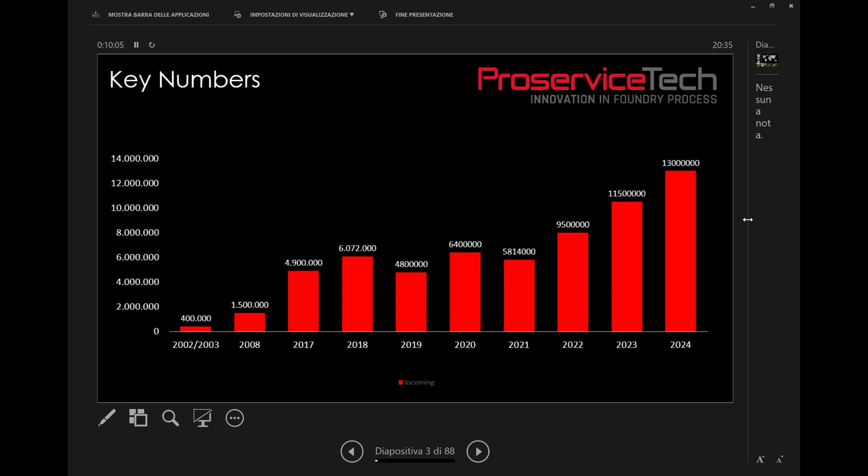Our turnover is around 11.5-12 million euro, and we are more or less 50 people, 90% engineers, divided in all the different engineering fields. So we have mechanical, IT, electronic, robotics, vision engineers, and metallurgical and process engineering. Okay.

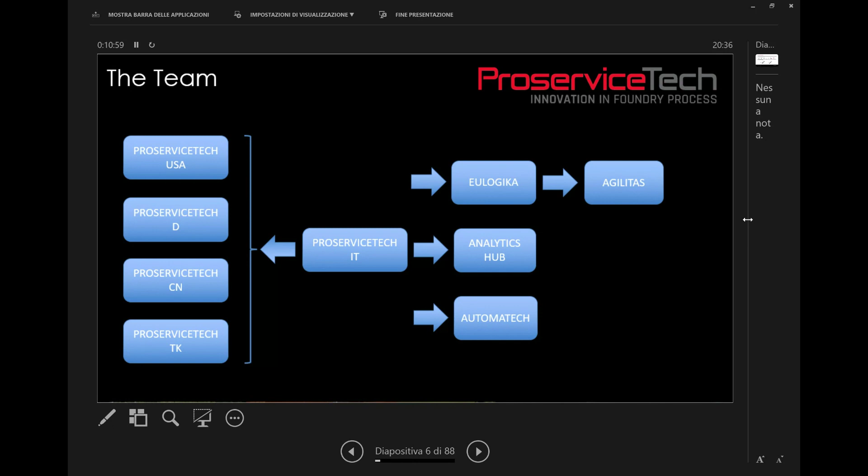So yeah, this is a little bit wavy, but on the left you see the places in which the company is. So US, Germany, China, and Italy, and also the other companies that we have. Eulogika is our IT company. Analytics Hub is a company that is also owned by us, a data science company, and Automatech is the grinding company. Okay. So why all these ranges of product?

Because at the end of the story, the leitmotif is always the same: sources of variance. So we know Trevor because from 2004 up to 2015, we worked as an engineering company of Foseco. So we developed for them some machines or processes like the converter, ICME converter system, or other solutions like the in-stream inoculation device. And we introduced inside Foseco the thermochemical analysis system.

In 2015 we closed all the agreements with Foseco, and we developed our sales network, and now we are working totally independently. But the idea is always to search for sources of variance inside the process. This is very clear. It's not only important how wide the Gaussian curve is for each process, but also the alignment. So if you treat different phases of the process differently, at the end the total variance is very wide.

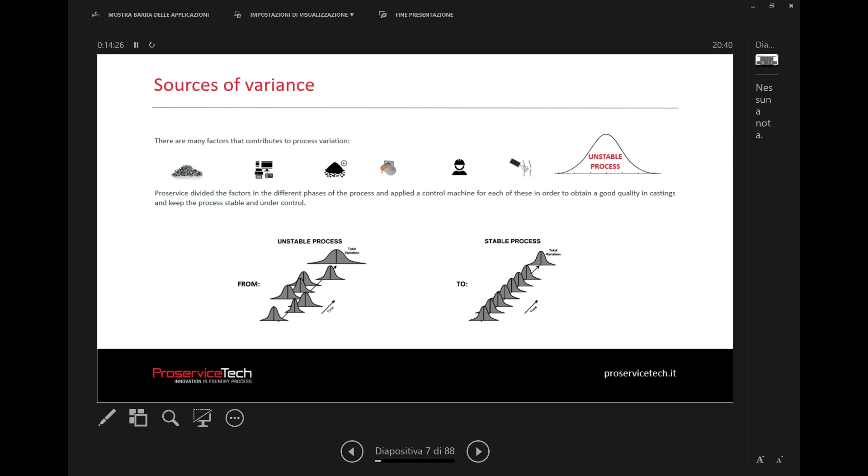I'll go quickly because it's a very long presentation. The presentation will start from base iron. I'll show our latest equipment, trying also to show some videos, and what is the difference compared to the traditional methods.

The first machines we will see are the ITACA Charge. All the products use the ITACA name on this side of the product, and the dosing machine is ITACA OptiDose. The ITACA Charge is an automatic crane—basically a CNC machine with a dual encoder for each axis. It's a normal crane, just a little bit more powerful compared to the standard.

The first machine we installed on the Z-axis—just to understand, for 32 tons per hour charging—uses only a 90 kilowatt motor on the Z-axis alone. It's a very fast machine, and this machine plays different roles in the foundry.

Normally we have three working modes: manual, automatic, and leveling. In automatic mode, you select the recipe and the charging crane automatically charges the charge cars, totally automatically. It's possible to identify a specific portion of the charge car to be filled with a specific material—so if we want a specific material to fall into the furnace first, to improve the induction, we can.

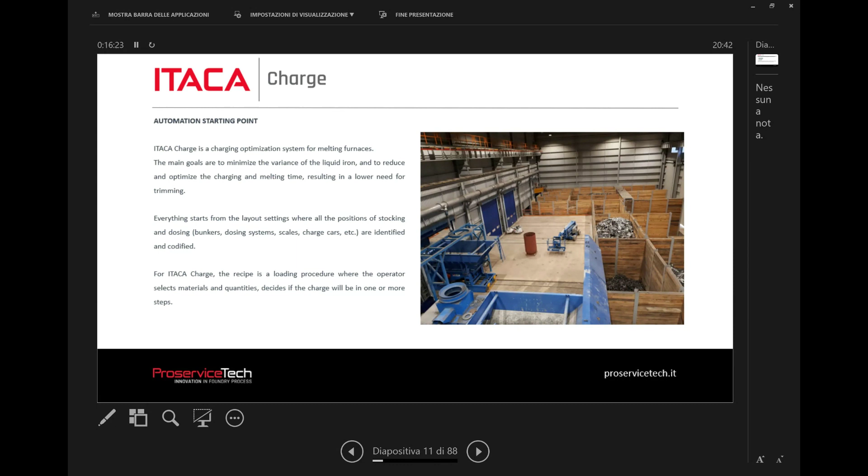The leveling function is another important function of the system. When the crane is not used for filling the charge cars, it can automatically homogenize the distribution of material inside the bunker. Every bunker is divided into 6 positions, and the magnet of the crane uses the Z-axis as a scanner, because there's an encoder on the Z-axis. So when the magnet touches the material, we automatically understand the level and height of the material, and we can define the distribution of material in every single bunker.

It's also possible to use the charging crane automatically for moving material from one position to another—for example, from one bunker to another bunker.

The most interesting thing is that this machine, like the dosing machine and the charging crane, they work together—this isn't easy to see. Once the recipe is selected—basically a standard recipe with steel, pig iron, returns, and so on—this recipe is delivered to the crane and also to the dosing machine. The dosing machine, which we'll see later, works together with the crane. The target is not to fill that exact amount of material, because that's practically impossible—if you use a big chunk of steel, for example, you can have variability between the real weight and the targeted weight for each material. What's important is that the system automatically compensates the ferroalloys in order to reach the chemical and physical targets of the charge—and this is exactly what the system does.

OptiDose is a range of machines, very custom machines. We can classify these vibro dosing machines into 3 different categories or families. For base iron, the one we're talking about is a centralized dosing machine with a monorail that delivers the mix of ferroalloys directly into the charge cars.

This is a new concept we've developed—a quite successful decentralized system. Most foundries have medium frequency induction furnaces, normally 2, 4, 6, or whatever. This machine works for every 2 furnaces and is able to deliver material left and right, placed in the middle of 2 charge cars. We'll see why we've done this solution.

The other dosing machine is normally for dosing material into the ladle—so ferrosilicon, magnesium, and cover material, or just corrective material.

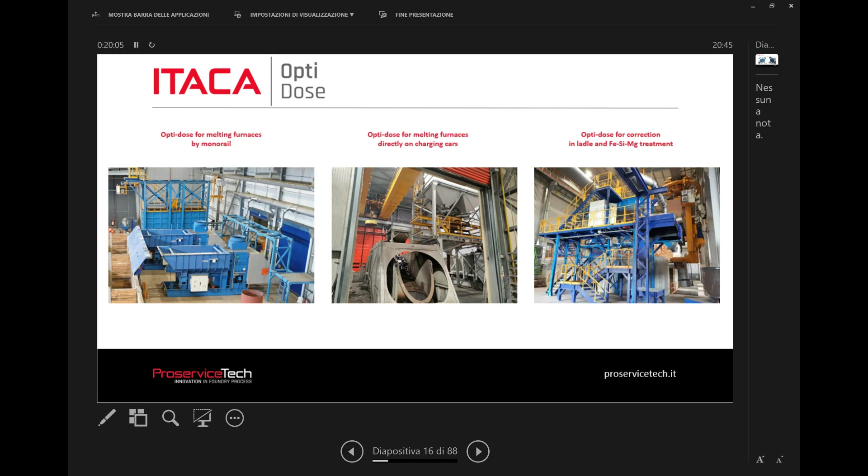So this is an example of the OptiDose. For example, this is an installation in the US, an automatic big bag system for filling the right silo. And here there is the monorail bucket that collects the material from the vibro dosing system and delivers it to the furnace.

This is a very traditional system. We have not invented this system, it's quite common, many companies do this. Its big limitation is the speed. Why? Because the approach in base iron production is always the same: a recipe. The operator has to follow a recipe, and the dosing machine has to follow a recipe. This machine works perfectly in this mode, but it's very slow.

So if you consider that this bucket has to collect the material here, go up, then deliver 40 meters away and go back, okay? So you need 5 or 6 minutes only to reach the target.

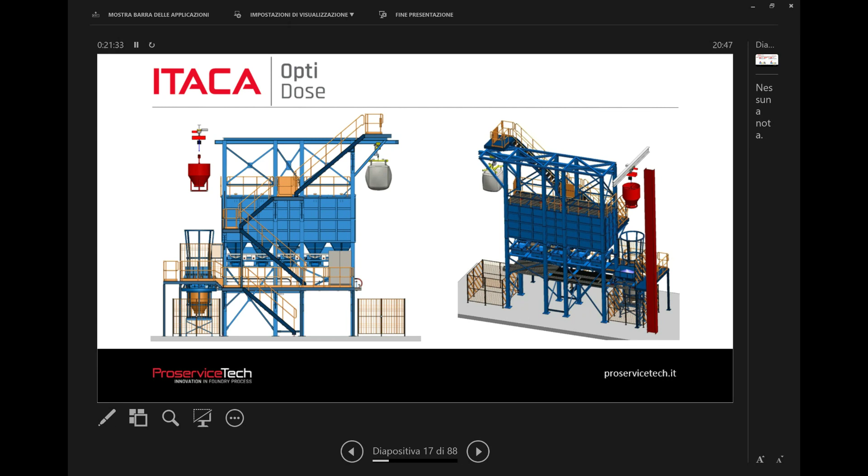This is important if you want to use a dynamic mode. What is a dynamic mode? The dynamic mode is this concept: when we select a recipe in our logic, we fully charge the charge cars, but not the ferroalloy dosing system.

Normally there is a parameter, can be 80 or 90%, but we prepare the ferroalloy mix only 80% for each material, not more, because the last amount is calculated based on the real amount of raw material that the crane puts inside the charge cars. But we don't want to delay production, the melting of the iron. So what the system does, we need a dosing system that is very fast in preparing and also delivering. And this is the concept of the decentralized solution.

In the decentralized solution, every single material is measured at the same time. So there is a measuring system, a weighing system for each material, specific to the amount of that material.

So for graphite and ferrosilicon, we will have a very powerful vibro dosing system. But for ferrochromium or other materials that you normally put in a lower amount, the weighing system will be smaller. Smaller means also more accurate, okay?

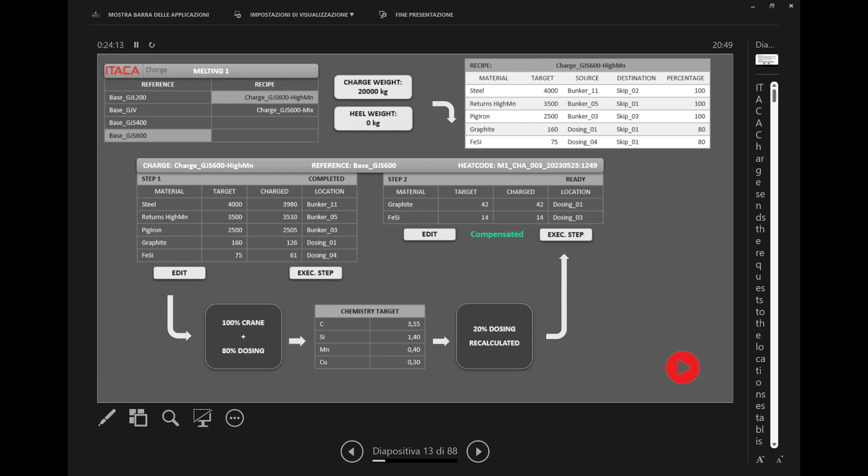I will show you just a little video of this because it's a real video, the simplest solution.

Okay, so what you can see here is selecting a recipe. This is the crane, it's visible, it's not so far from Venice. It's a foundry very close to us, a former Electrolux foundry. The crane collects the material and makes all this operation, done completely automatically.

So also the trimming of the material, the measuring, and it's delivered. You can see that the charge car is divided into 4 positions, and we can target a specific position.

Here you can see the dosing machine. The dosing machine is in the middle of 2 cars. In this specific foundry, we have 2 ABP furnaces, 23 tons each, so it's big, and then they have another 2 of 12 tons.

So the dosing machine has an independent weighing system for each hopper and a car that can shift left and right. In this case, the car collects, shifts left or right, and quickly delivers the mix. So we don't need the monorail to go up and move to the target furnace. If you want a dynamic approach, this is the only solution because it's the fastest solution you can have, okay?

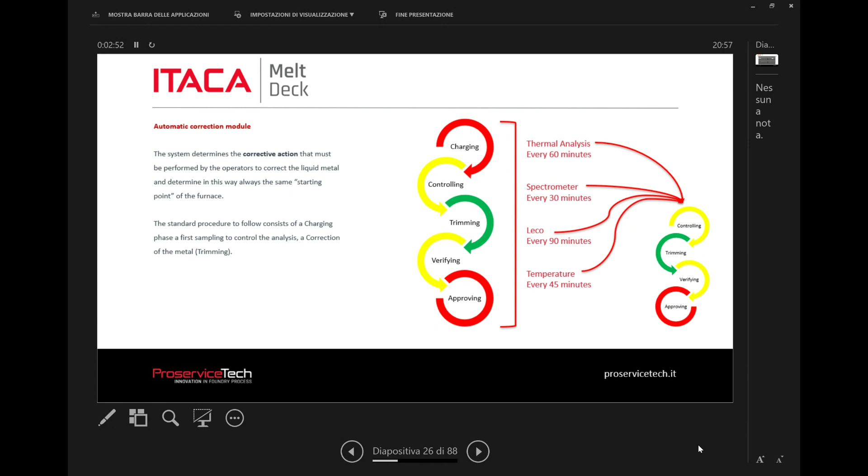This action can basically be addition of ferroalloys or temperature adjustment — it's very simple. You can also create the action. So the system suggests the measures, how much ferrosilicon or graphite to add in order to enter the acceptability range, and you can send the corrective mix directly to the dosing machine.

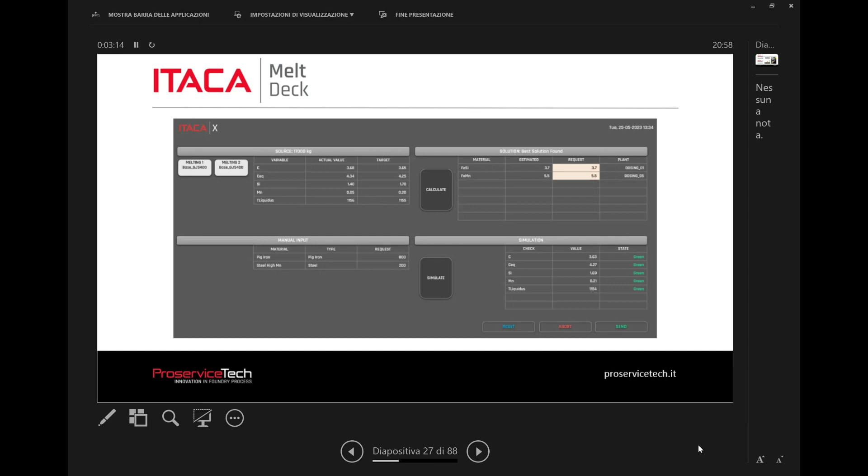Everything is traced. Scale: every single machine in our network has 4 lights — for example furnaces, pouring furnaces, or in no-bake foundries also in a specific position of the factory. The green light means that all the parameters are inside the acceptability range.

Temperature, the probe, or it can be the probe from the melting furnace too. So the concept is that every single source has a specific validity time. So if you want the operator to check that specific source every 10 minutes, or every 30 minutes, every 45 minutes, this depends on your process, a few minutes before the time expires, the blue light starts to flash. And if the operator doesn't make the check, the blue light becomes solid and all the other lights disappear.

So basically crossing through the foundry and seeing this light, you can understand if the base iron inside furnace 1 is okay, or the final iron is okay in that specific moment, specifically for this casting that you are pouring, okay? So this is the concept.

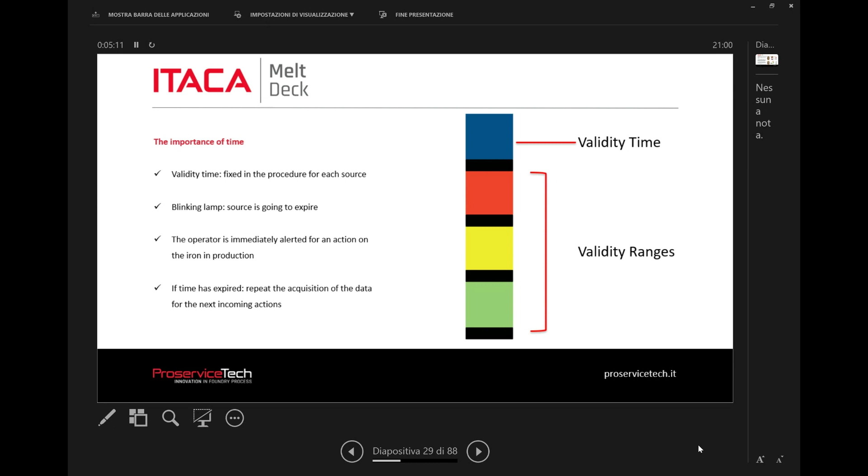It is possible for the operator to force a non-green light to a green light. In this case, the green light will be a flashing green light, and the operator can select from a list of reasons that you have created for him. Like, for example, the temperature is not in range because I'm giving power. In 5 minutes, it will be in the range. So this is an example in which you have a very basic procedure. The system suggests how to check, and you enter inside the range.

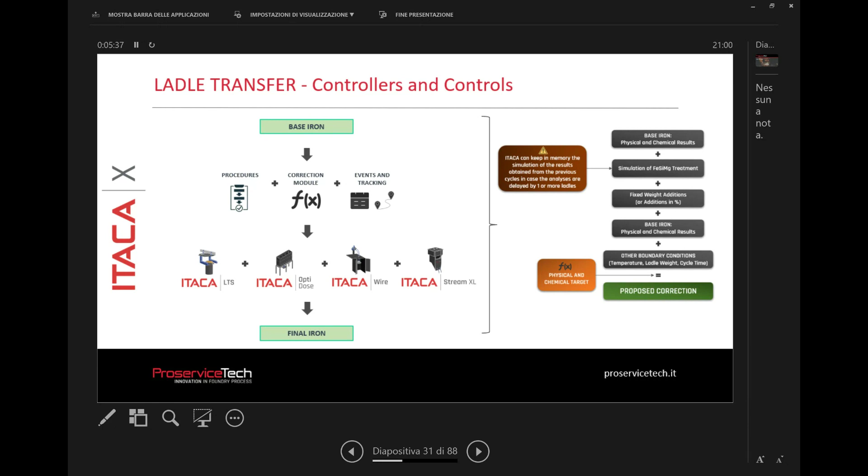At the moment, of this system we have installed approximately 120, 130 systems everywhere in the world. Normally quite complicated systems also. So OptiDose, for this is an example. In this foundry, we have created this aerial transportation system. This is MTI in Mexico, and this is a completely automatic foundry in which we also have this automatic alloy dosing machine that puts ferrosilicon magnesium and cover material completely automatically. This is the foundry of which I also have a video.

Let's see if it starts there. No, it's not starting. It's starting somewhere else. Okay, let me. Aerial transportation systems for us are these systems. Okay. The resolution is not.

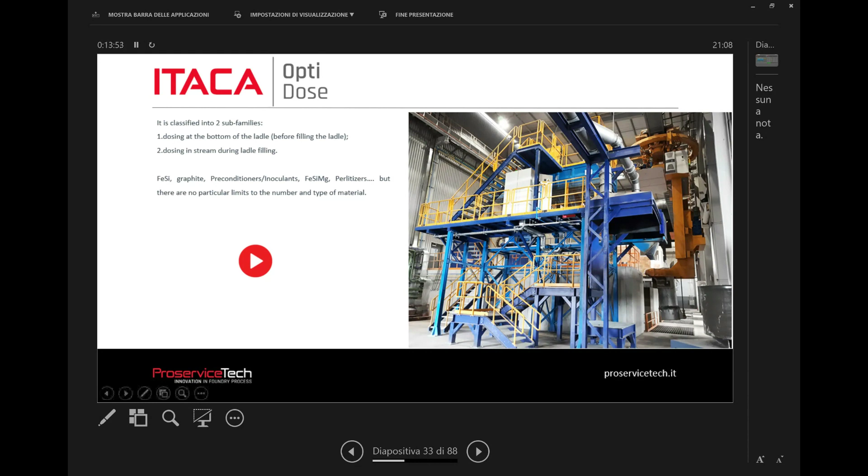Let me understand how to, okay. So I go a little bit faster.

So wire, I know that in the UK wire is not a favorite solution. I like wire a lot, even if we are very objective. So we do ferrosilicon-magnesium alloy stations, like the one that we have seen in MTI. I like wire a lot if you are thinking to automate the process. Our approach is always the same: making something that is very dynamic, and the wire in terms of dynamicity is the best.

What I like a lot about the wire is that from some point of view it is very similar to the converter. In the converter, the logic was fantastic: put the preconditioner inside the ladle, let the preconditioning react, and only after make the treatment. Why? Because you need time to activate correctly the nucleation. With the wire, every addition you make in the ladle works very well, because you create basically a new corrective phase compared to the sandwich or tundish process.

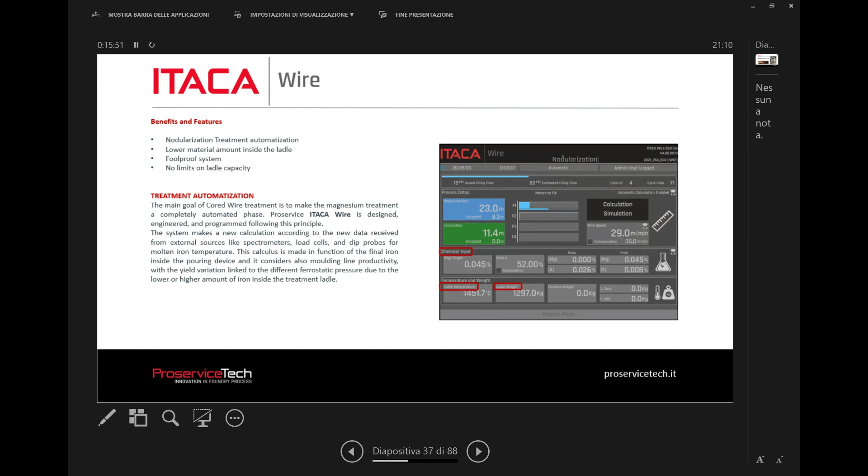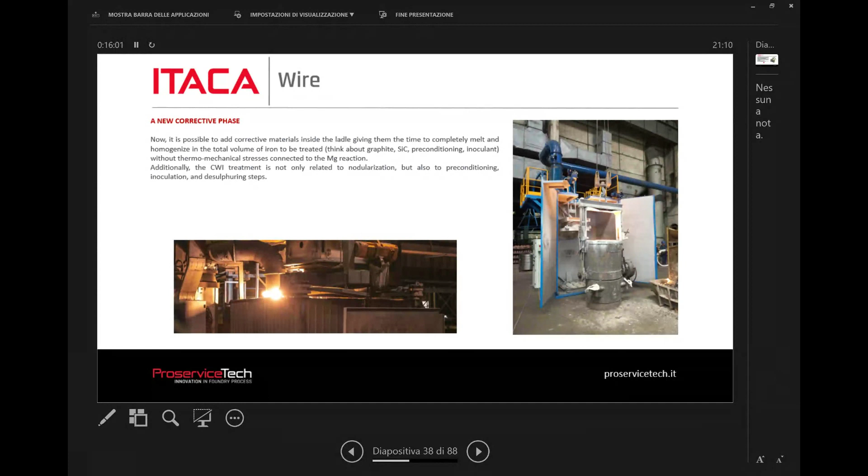Again, I'm not in favor of cored wire or sandwich specifically. In John Deere, we are working with a tundish. In MTI, we work with a sandwich process. So for me, it's really the same, but taking into consideration these advantages. Clearly, the disadvantage is the cycle time. If you are already squeezed with the cycle time, it will be very difficult to place a cored wire system. Okay, so these are some pictures of many stations that we do.

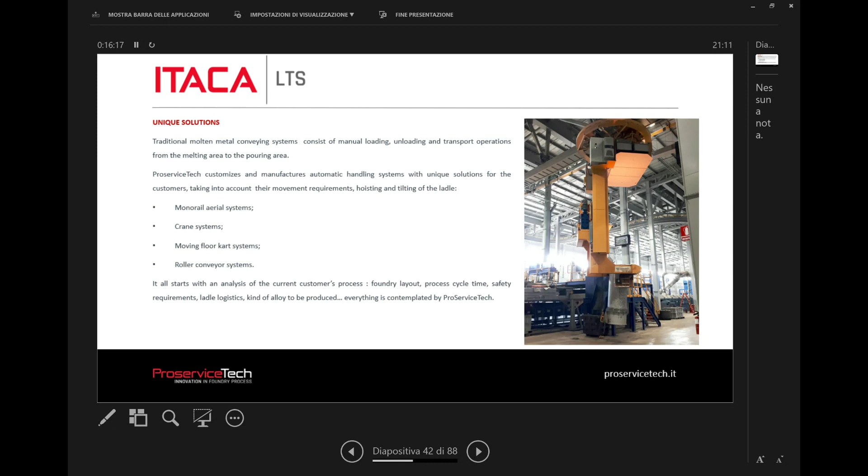The aerial transportation system we already talked about. So monorail, crane, or even car drive system for a ground transportation system are okay for us. Okay.

Let's proceed. ITACA Stream XL. This, for example, is a picture taken at William Lee. Again, also in this case, dynamic addition. The leitmotif is always this. At William Lee and at Castle PLC, we have installed this machine.

The target of this is to measure how much preconditioner you put in the ladle, and to make it as dynamic as possible. With this machine, it is possible to make it more dynamic. You can also make an automatic solution. For example, you want a level of preconditioning that is 0.2% at the beginning of the melting furnace, and then the longer the time, the higher the amount can be.

So if you have an oxidation factor of the furnace, you can automatically increase from 0.2 to 0.3, from 0.2 to 0.4, ladle by ladle when you empty the furnace. Or, for example, when you hold the iron too long, you can automate the increase of preconditioner in the ladle completely automatically. Basically, in this case, I'm talking about the solution at William Lee and Castle PLC.

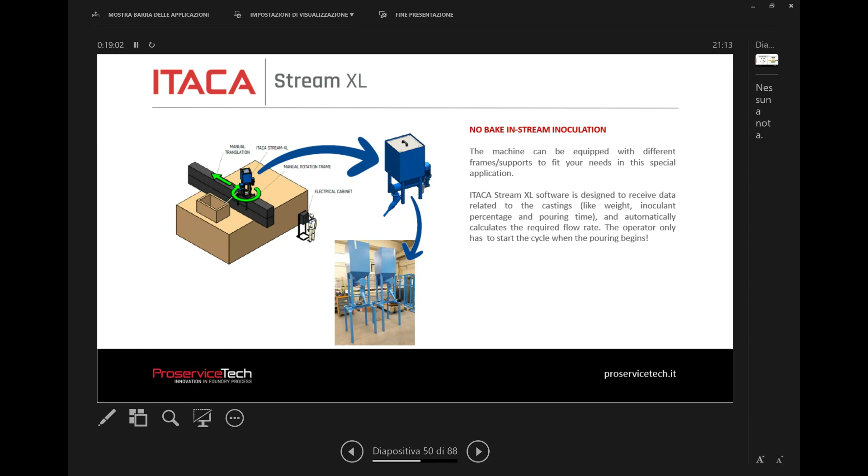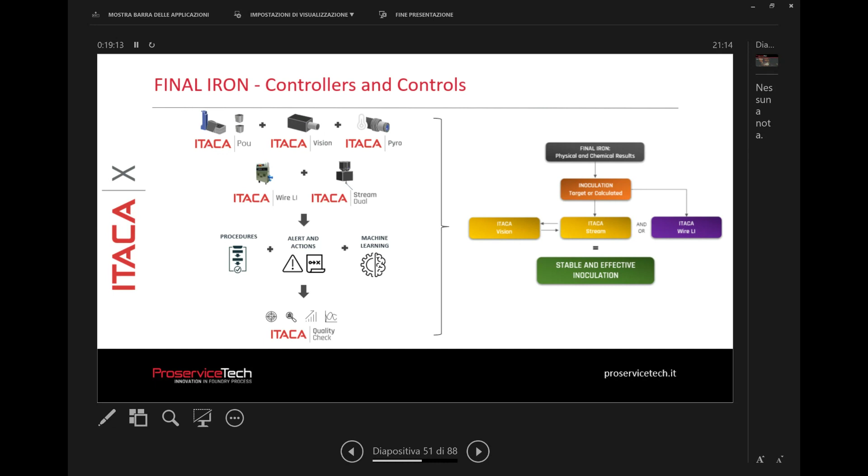It can be controlled with a radio control, so you can define the flow rate, how much inoculant you want inside, and you can also pre-load a pouring curve in this machine. So, final iron. Also in this specific field, we have some customers in the UK, like URAC, for example, who use these systems.

The pouring is the same concept. This is the supervisor of pouring, the screen of ITACA for the pouring side. Every single one of these is a mold. So basically, what ITACA does for the foundry is collect all the information. So thermal analysis is inside the system.

Chemistry from LECO or from a spectrometer, sand properties, inoculation properties, and also pouring parameters. And for each mold, it checks that all the parameters are inside the acceptability range. If only one is outside, you can have a yellow or red alert.

This is very important. Then we have developed some sensors for these specific issues. But what is important is the alert. The alert is the most important concept in ITACA: you can create as many alerts as you want. The alert is the combination of the status of parameters coming from different sources, because problems in the foundry never come from a single source.

As an example, the cold shut is a combination of low temperature and high liquidus temperature of the iron. When the difference is too low, the viscosity becomes too high, and then you have problems. But the temperature comes from the dip probe or the pyrometer, and the liquidus comes from thermal analysis, and you have a lot of different parameters coming as a combination between sand properties and chemistry, for example, pinholes or whatever.

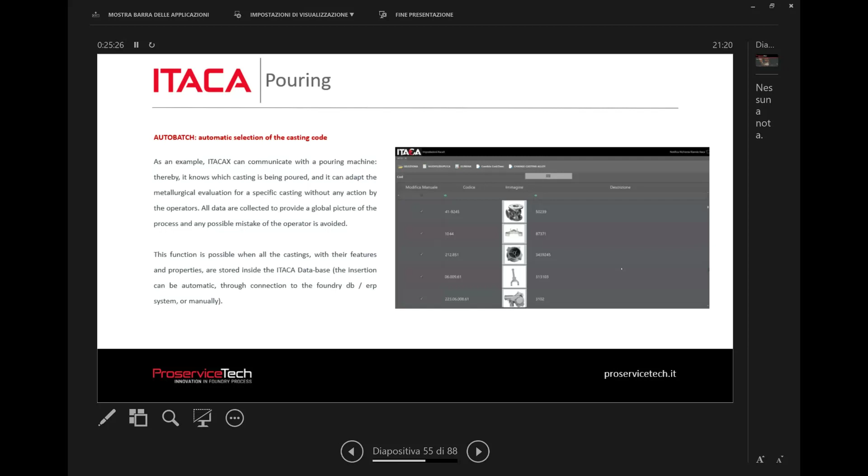I want to show some quickly. Yes, this is the database of castings. Normally the system is installed and connected automatically to the molding line or to the pouring furnace. So we receive the information about the casting, and we adapt all the acceptability ranges and parameters as a function of the casting that you are pouring.

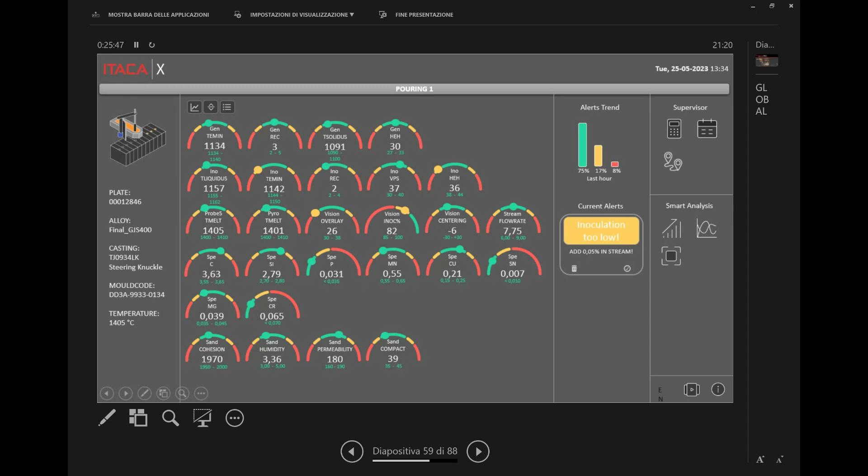Alerts, I explained; this is an example of alerts. So this is a typical procedure for final iron. Everything has to be in range. You have physical parameters, chemistry, sand properties, temperature, and so on. The vision, this is something I want to show you because I think you don't know it.

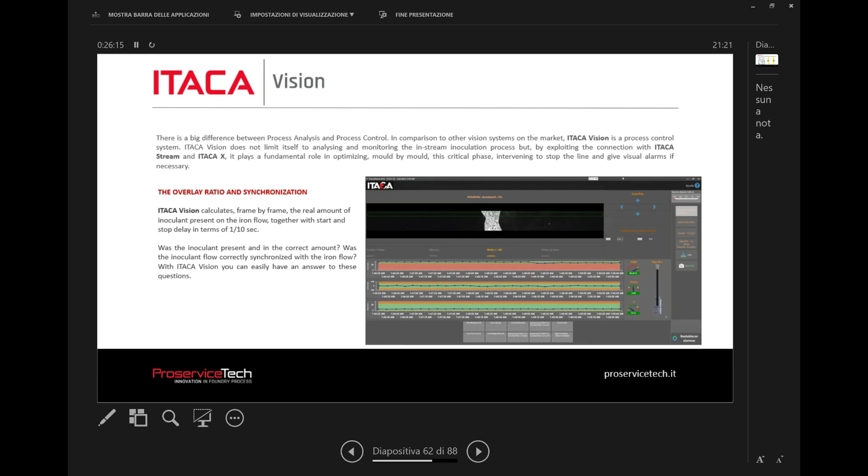This is a camera, and the first step of this project was developed with Foseco. The first prototype was developed in 2010. Now we have reached a really very good result. I will show a bigger picture. Okay, this is more clear. So it's able to measure the position and dimension of every single particle of inoculant, 30 times per second.

Our camera uses 30 frames in natural light mode and 30 frames in overexposed mode. So basically we alternate one and one. In the normal mode, we see the inoculant on the iron. In the overexposed mode, we use the light emitted by the iron to highlight the inoculant that is going out of the iron, and this is done 30 times per second. So the system is able to see how much inoculant there is and if it's perfectly aligned to the stream.

So these are some pictures. This is Draxton group in Spain, and this was a very strange period of time. For 15 minutes, this is a DISAMATIC, it was perfect, and then it was moving left, and for 15 minutes it was distributing inoculant like this. But they never saw anything. They scrapped. They tried to understand what happened, but they would never be able to understand.

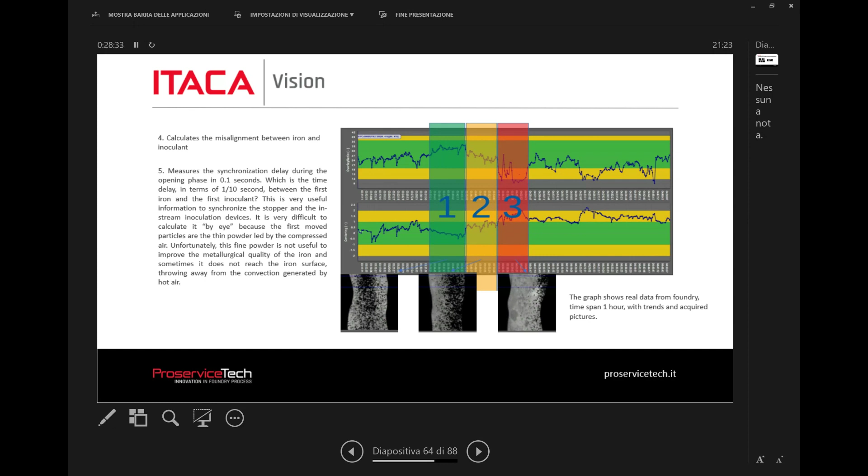This is an example. This is the standard mode, and this is the overexposed mode. So you see that using the light emitted by the iron, we can highlight the inoculant that is going out. So we can understand very well if the pipe is centered or not.

There are also other things that this system does. For example, measure the turbulence of the stream. So clearly, this stream is very, very laminar, okay? The laminar is a rectangular shape. This one is absolutely far from laminarity. So the system measures a laminarity index.

Also, this laminarity index was created the first time for the Pittsburgh University. And at the moment, our first prototype is working in a German university for measuring the efficiency of the stopper design. Okay. But what happened, for example, here is that the most part of the inoculant is inside here.

So many times this iron splits in two parts, you cannot see with your eyes, and the inoculant goes into the center. So you think that you are inoculating at 0.1%, but at the end you are inoculating 0.05 if you are lucky. Okay, this problem clearly is a big problem in DISAMATIC. Okay, in big molding line, this is not a problem.

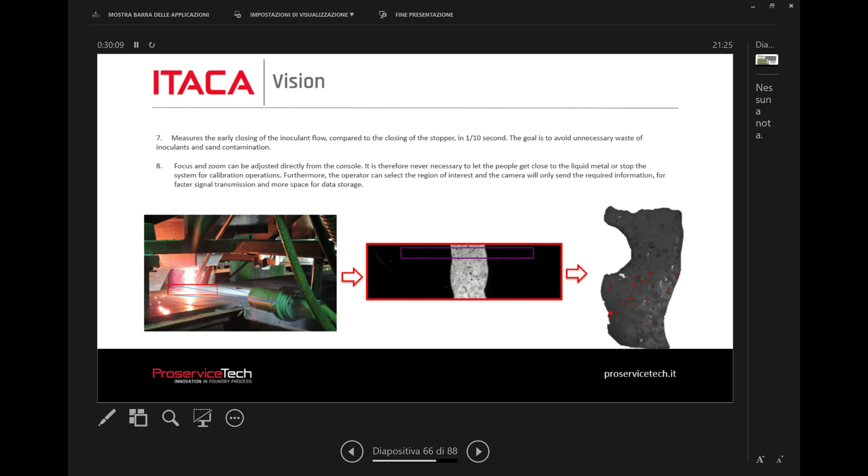Okay, so I go further. This is another example of the dual frame. Probably I have also a video.

I want to show also the presentation about the Arena product. How much time do I have? 15. Okay, I go faster. Sorry. Okay. I don't know why it started from here, but.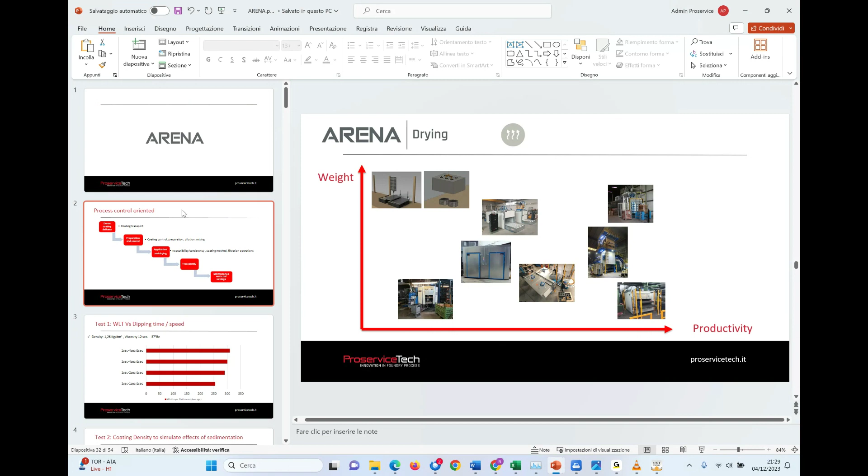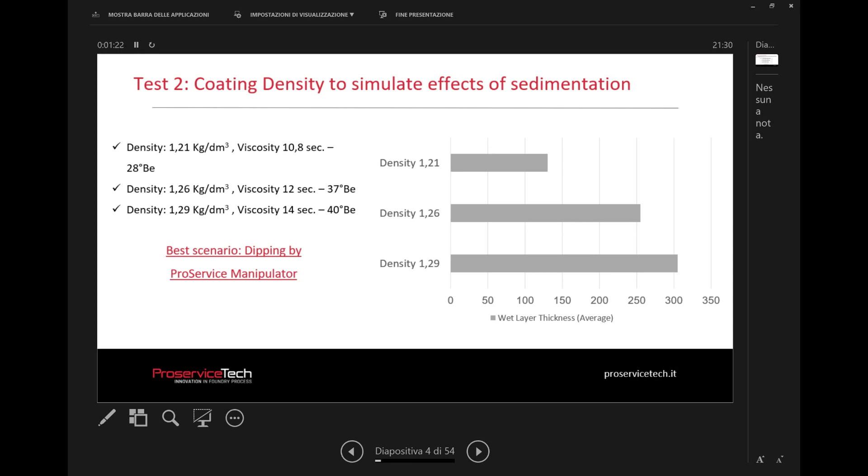Another thing is the effect of the density on the wet layer thickness. So if the density is 1.21, 1.26 or 1.29, the effect clearly is very, very strong, as we expected. This is very important because the sedimentation inside a dip tank produces exactly this effect. Okay, so this is measurement of wet layer thickness using a manual manipulator, or for example the flicking.

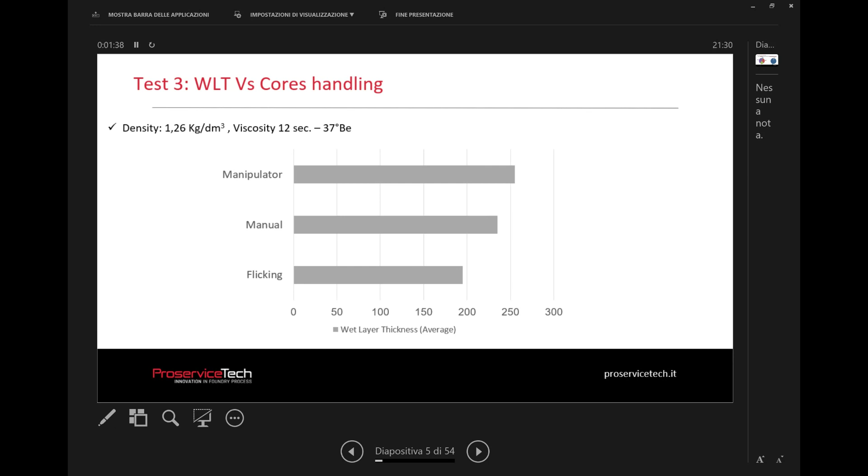Our manipulator, if you use a manipulator to go inside the dip tank, the variance is very, very low. We have developed these dip tanks, and I will show immediately how they work.

The concept here is to produce a coating automatically with constant values in terms of density and viscosity. We apply the same concept for the flow coating station and for the dip tank. In this case, this is Ferromatrix, big cores, but also molds for this application. Here you can see how it works.

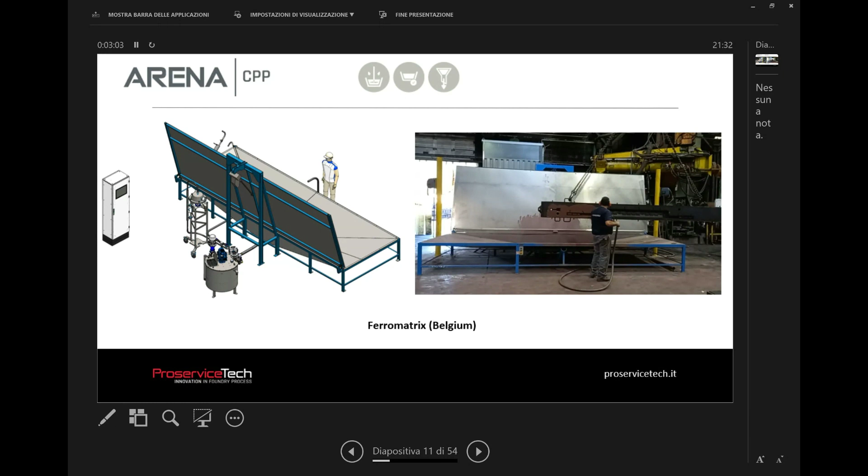So the concept is this: there is a tank in which the coating goes back, and inside this tank we add coating paste, water, or alcohol also, in order to automatically maintain stable density values and also the viscosity in case the customer has a specific request. For example, in Brembo, the control procedure uses density and viscosity together - they don't accept only density.

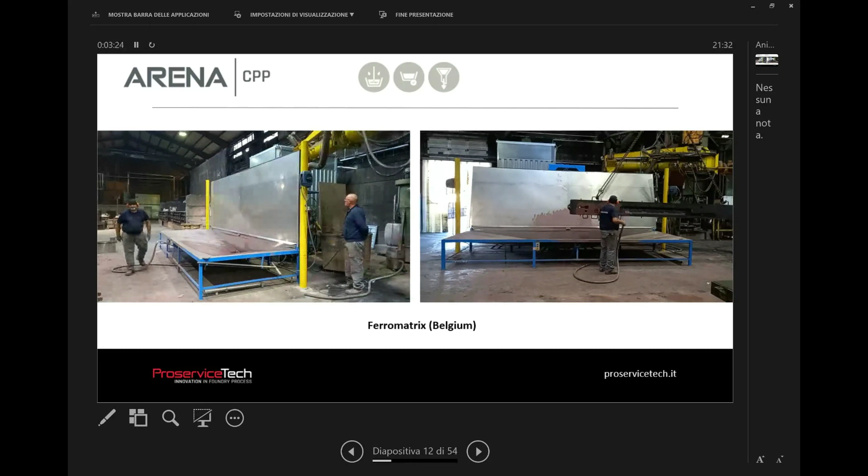Here we can see how it works - just a flow coating, I can show the video together also. It's a foldable tank. So the coating preparation plant works exactly with this principle. You can use it, for example, for engine blocks in Scania, Daimler, also Georg Fischer - they use all these kinds of tools.

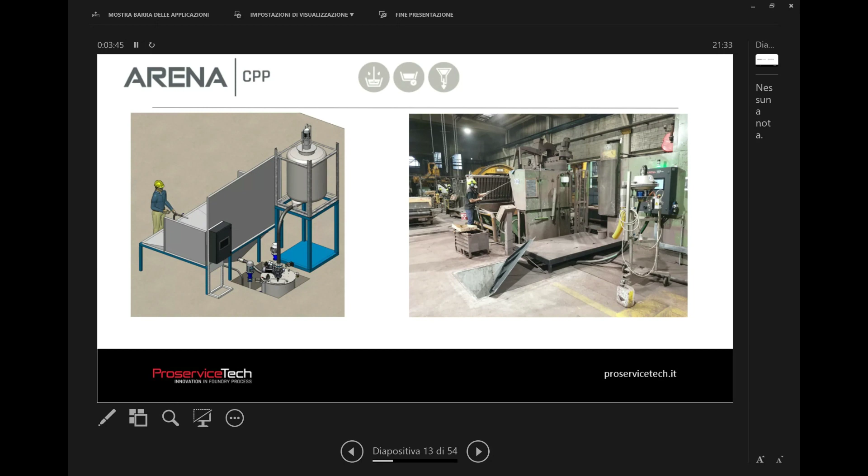And this is a manipulator. I don't remember - it's a German foundry. And this is Van de Wille.

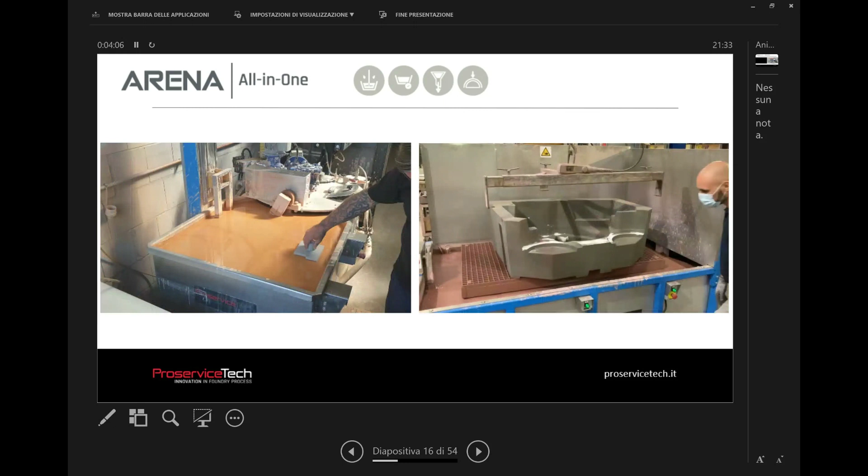With this manipulator, you can control the speed, the time, and you have a specific recipe for each core. So we control the density inside the tank, the viscosity inside the tank when required, and all the other parameters: the dip time, the lowering time, the dipping time, and the ascending time.

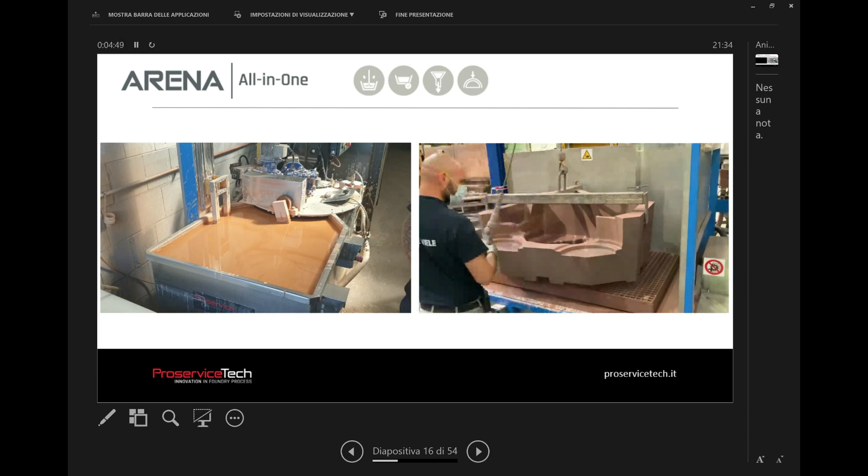One of these systems is installed in William Lee too. With Foseco, we did the first one in Forgemasters also, for the big flow coating tank that is still in use. In the UK, no, we don't have other installations of these systems.

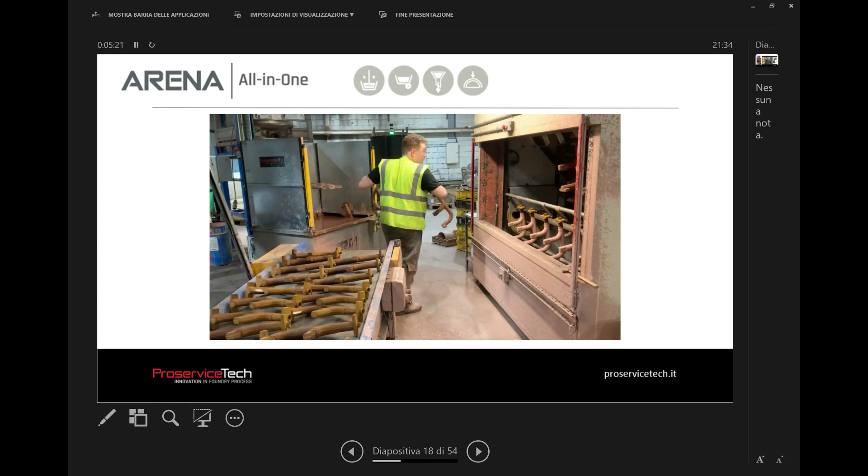Okay, we go - so this is William Lee. This is just to show you that it is possible to use this tray, this manipulator, in many different ways. In this case, for example, it makes dipping, but also removes the drops of the coating.

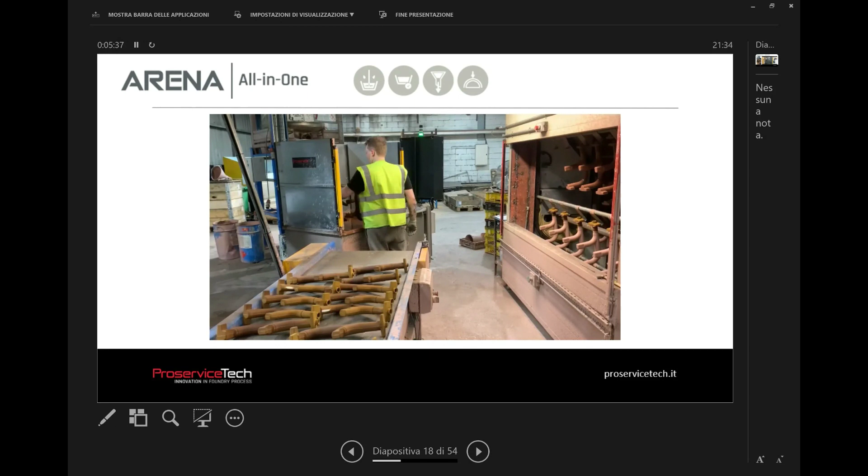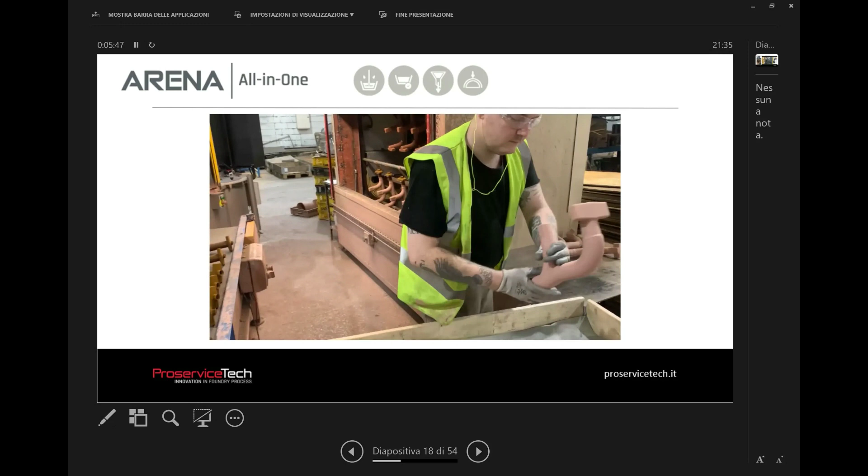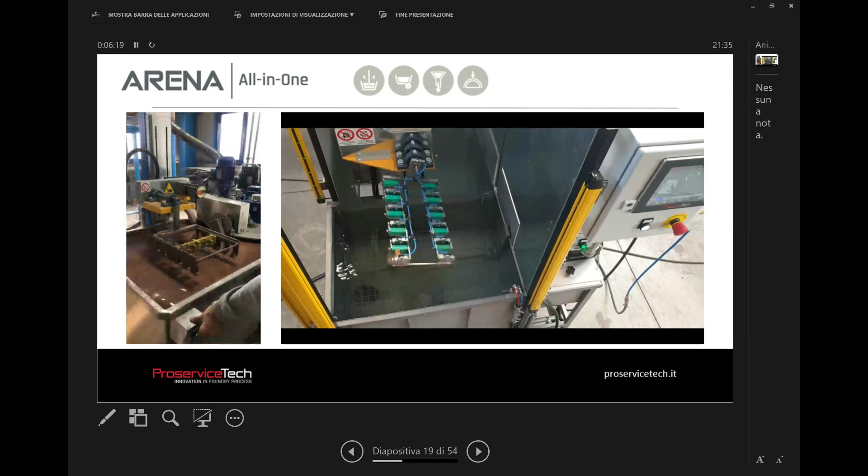So you will see now a specific example. Here there are so many samples - we have done really a lot of these machines. This was in our company, but you can make many different things with the same machine. This is SLR in Germany, in Elsterheide.

In this case, we don't have any manipulator, but the quality of that coating is always the same. As an example, in hot countries like South Africa, hot and not properly clean countries like in South Africa, in India for example - India is a disaster - all the water that is injected into the system in order to maintain stable density and viscosity is disinfected. So we have this UV treatment system in which we remove all the bacteria to avoid bacterial attack.

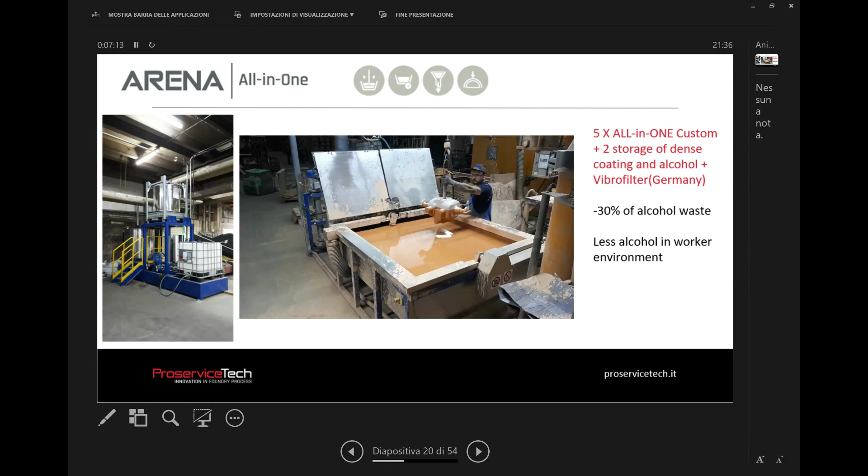This is another thing that we do, what we call multi-cell. This can be also interesting for your foundries. It's a different concept. Normally you have the core shooters, you have the dip tanks on board, and you have this drying oven that is just one, used for all the production.

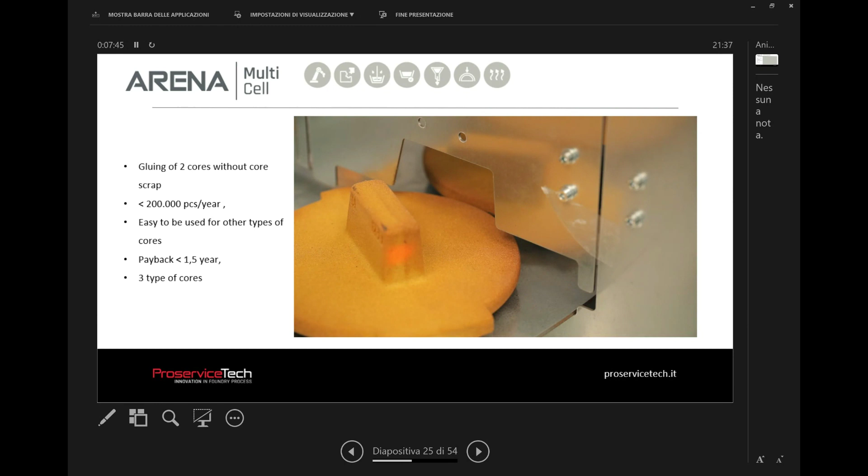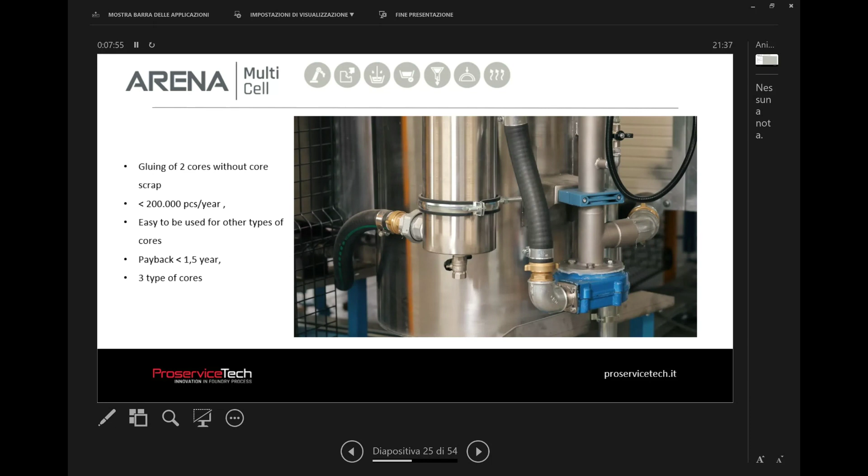In this case, we have done this autonomous cell, a robotic little cell, also relatively cheap, and inside the cell you have the robot, the automatic dip tank, and also a little drying oven. So it's a cell designed only for a specific core shooter - it works for one, maximum two core shooters. The shape of the furnace is rounded.

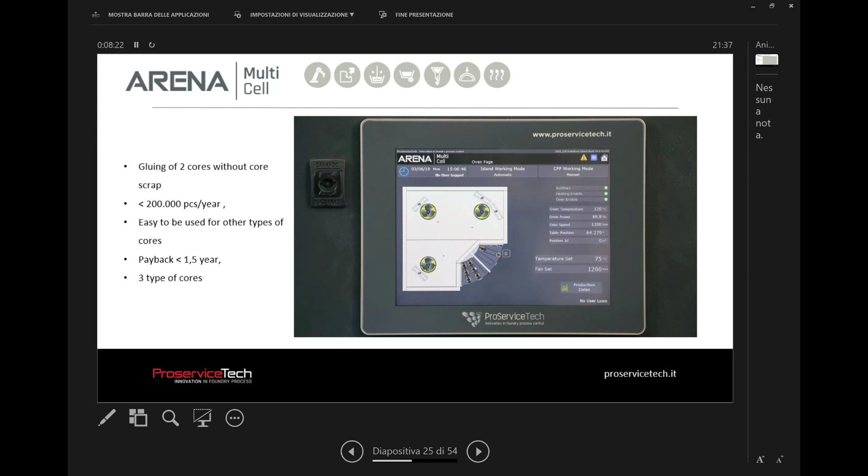So the robot basically places the wet cores, and the wet cores make a circle, and then immediately close to the wet you have the dried cores, and the same robot does dipping, in some cases gluing, places them on the drying oven, takes the dried cores and palletizes. So basically you don't touch the cores - you don't have any operator. The only thing the operator can do is remove the pallet and eventually feed the robot.

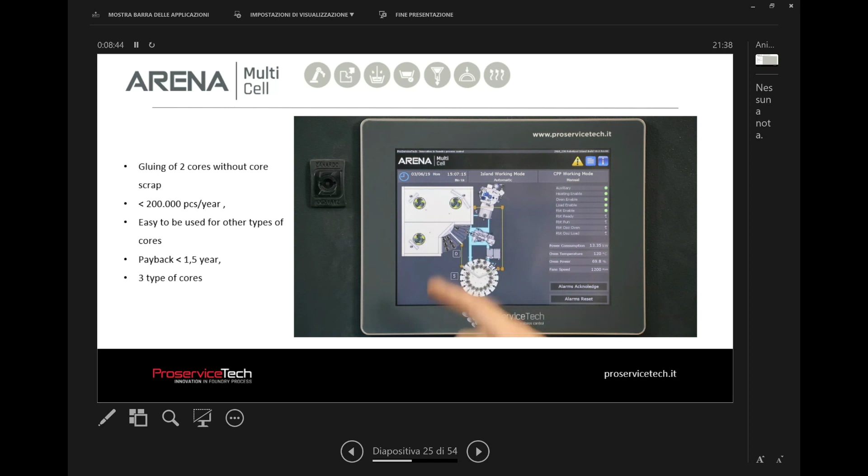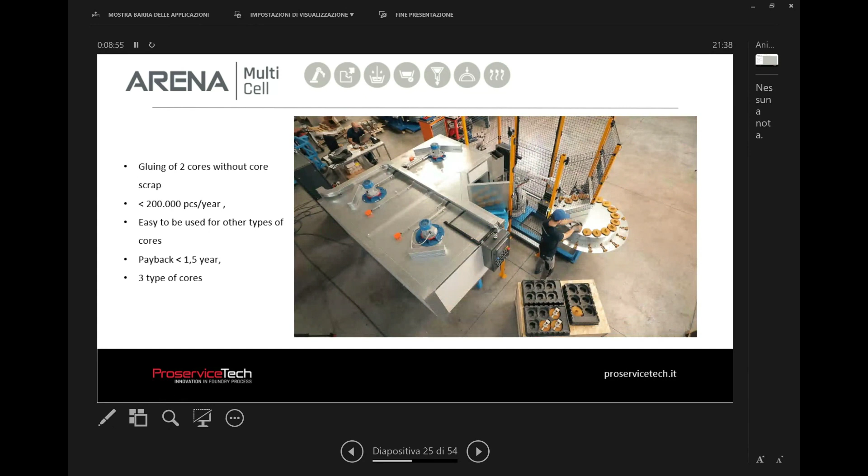Also this - so you see this is the furnace, let's see - yeah, so it's charging the cores. This is another logic, so the robot doesn't take out directly from the core shooter, but because it's also making gluing.

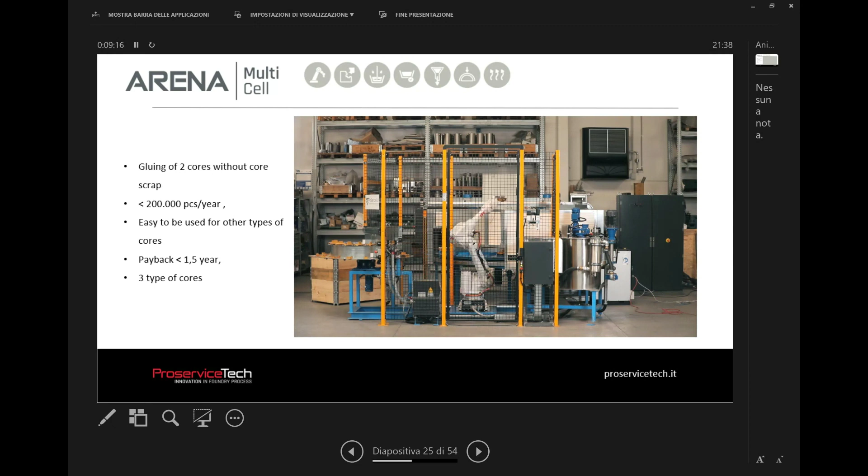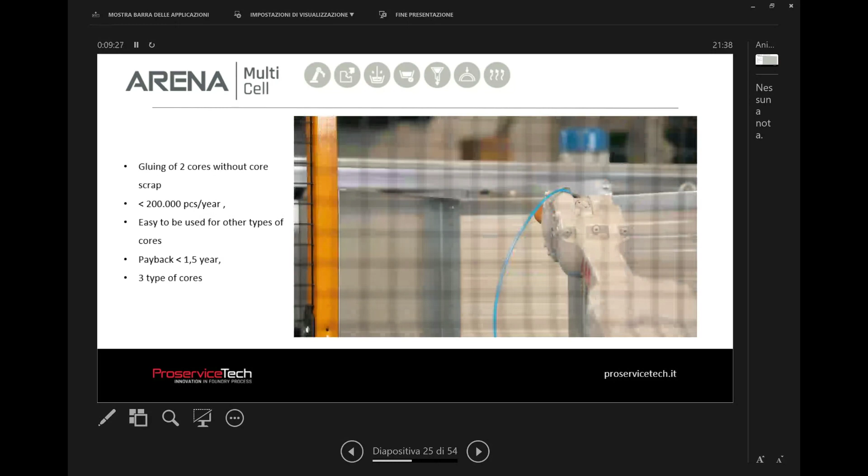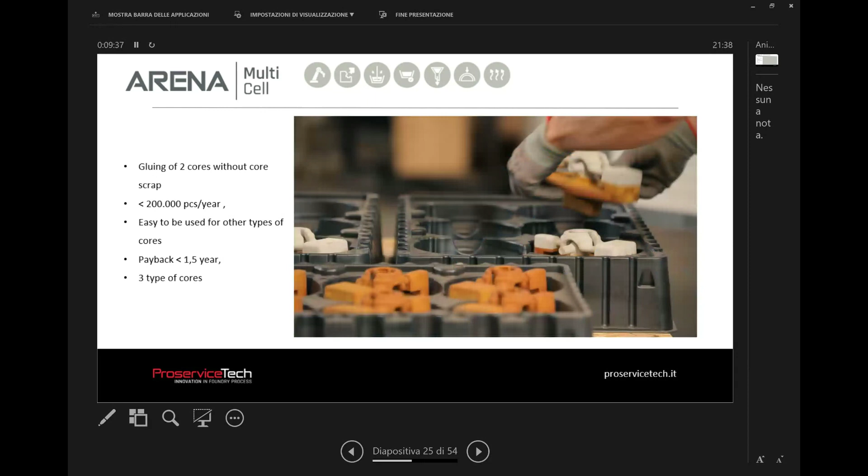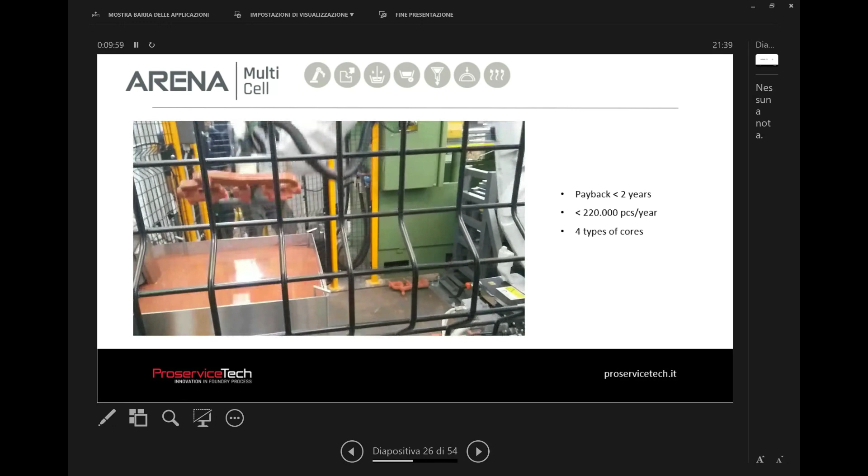We have also an installation which does gluing and screwing. In the robot, you have on the right part the wet cores, and on the left the dried cores. In this case it's the operator, but the robot can also place directly on mount. It can be a rounded furnace, but also a linear furnace, like in this case, in which the robot takes out from the core shooter, dips, and places on the drying oven. The drying oven is very short and cheap, 2 levels, up and down. It's only about 3 meters, not more.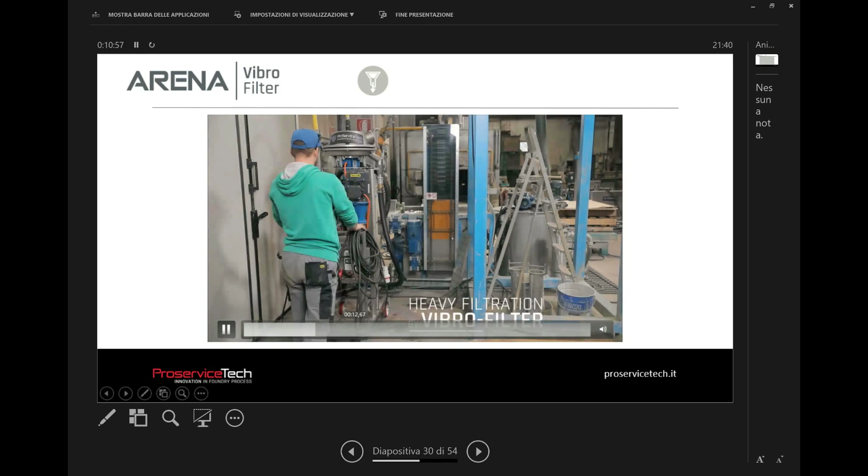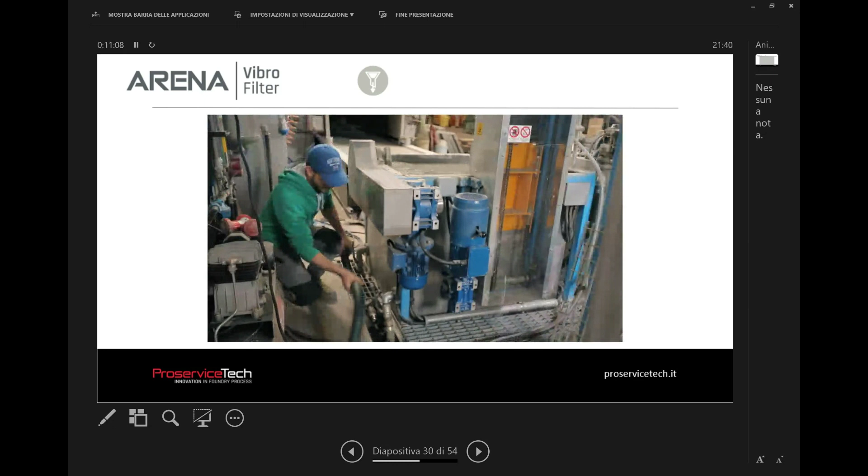This machine is movable, and you connect the fast connector to the dip tank. In this case it's our dip tank, but it can also be your own dip tanks. And you let it work for 1 hour.

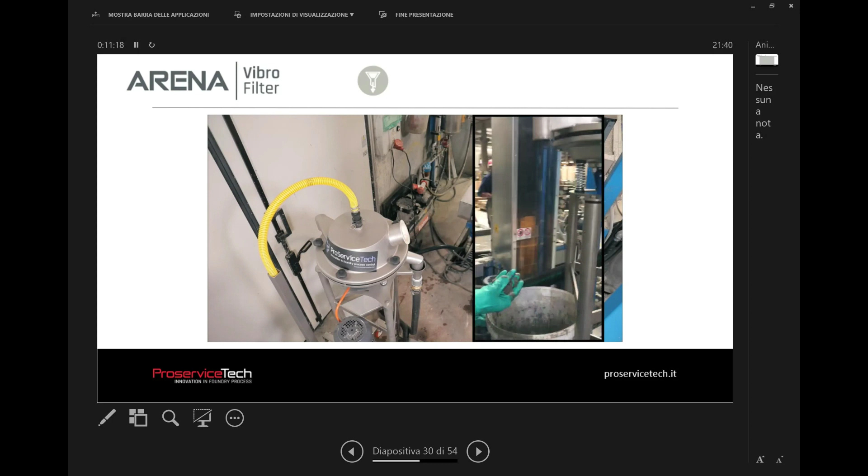We have developed this electric pump that works instead of a diaphragm pump. It's very silent, very efficient, and has a very long life. As you can see, it's not clear here, but the coating enters here, and from this output the sand particles go out. The other coating enters again into the dip tank. So with this system you can remove even these sand particles.

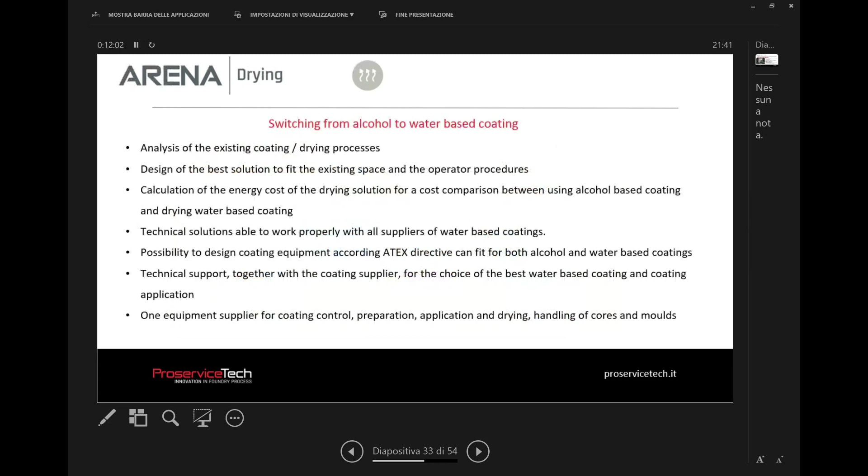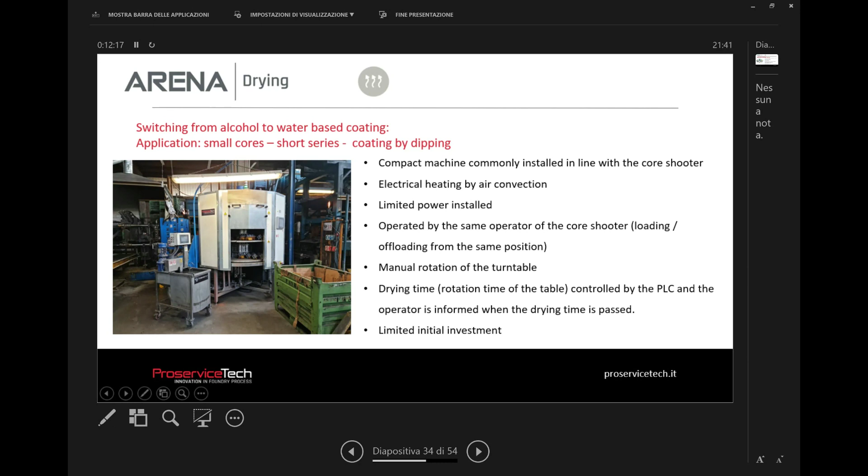Drying, we do a lot of drying ovens. Daimler, we have done one. All the Brembo plants in the world use our drying ovens. Yes, we have a lot of these drying ovens. So this is the simplest solution, for little core shooters like this.

So they are drying panels. They use infrared plus air, a lot of air, because we use axial fans. So low pressure, but a lot of air, combined with infrared, are able to dry big molds or big cores.

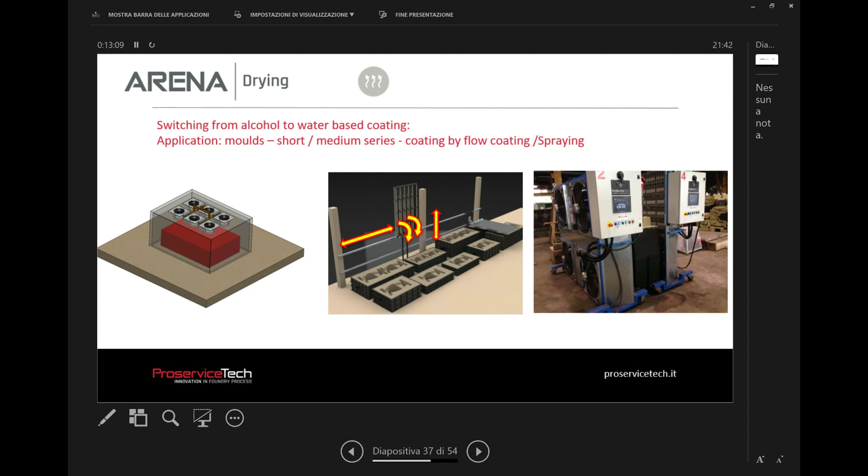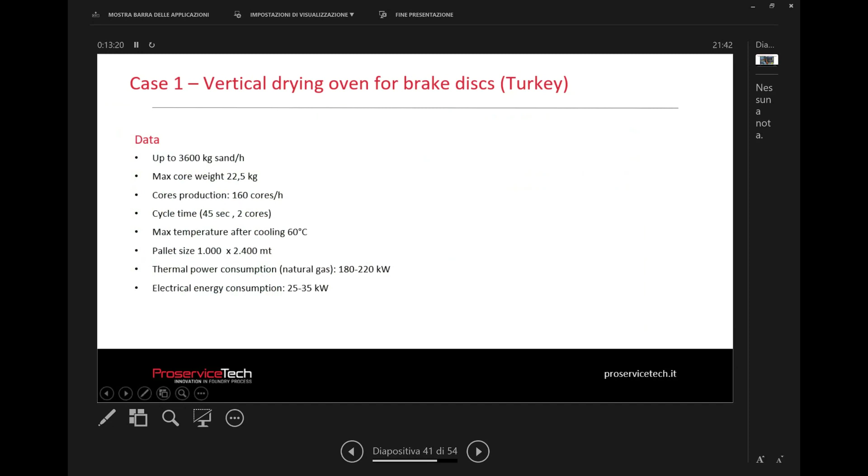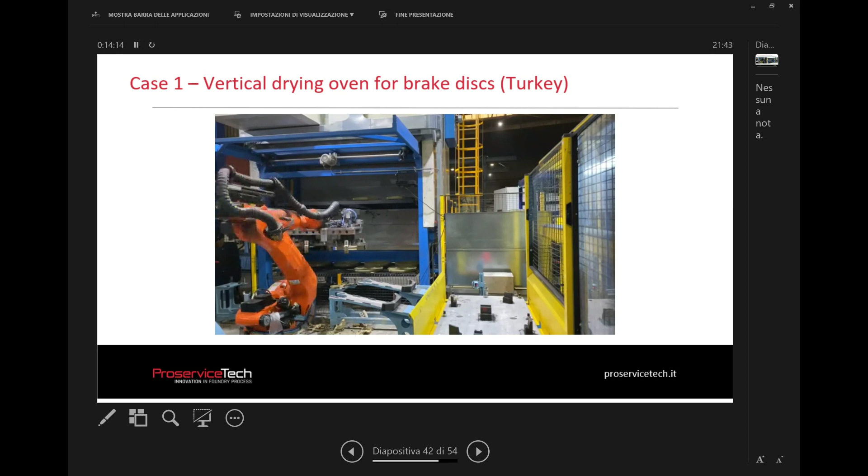For example, this is Eku Fren. We have delivered 2 of these vertical ovens for brake discs, with robots, so directly from the core shooter to the drying oven, with our dip tanks also. The dip tank is not easy to see, but it is there.

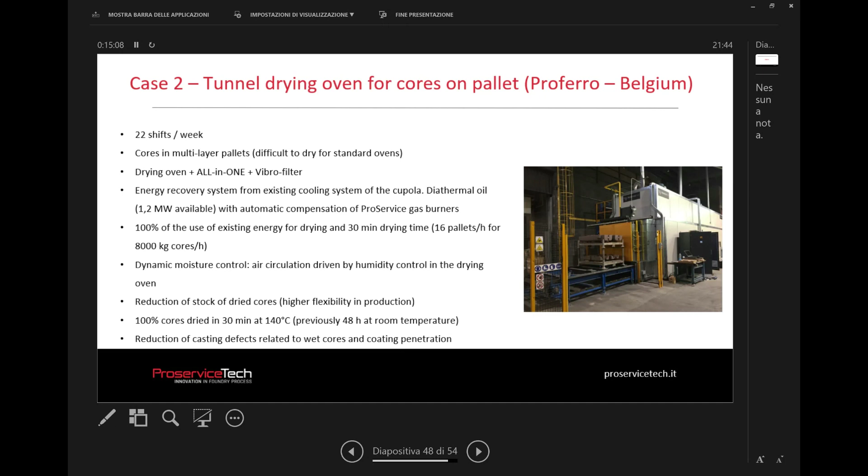This is Proferro in Belgium. This is a multi-purpose drying oven. In this case, all this roof here, we use the energy coming from the cupola, the diathermic oil, to dry the cores. We recover that, and the only moment we use the gas burners is when they don't have enough diathermic oil; otherwise it's completely cheap, zero consumption of natural gas. And you can easily put whatever you want, big cores, even a steel pallet on top of this. It's very flexible.

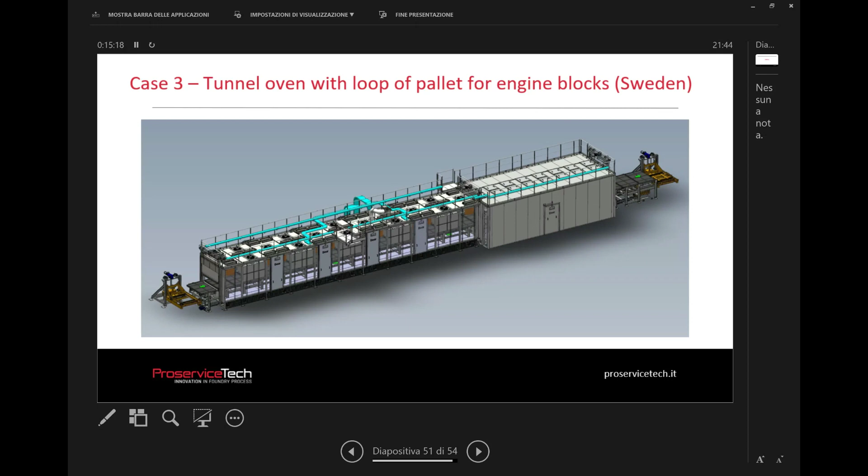This is Scania. We have delivered 2 of these drying ovens for engine blocks, huge furnaces, divided into heating and cooling sections here, and also the dip tanks.

The logic we use, also for brake discs, is very similar to a Dyson air dryer. Dyson air dryer works at low temperature but moves a lot of air, and this is exactly what we do in our system.

As an example, in the first drying oven furnace we delivered to Brembo in 2004, the drying temperature for car brake discs was 140 degrees Celsius. In the new generation, we dry at 85 degrees. So clearly the energy loss is much lower, and in terms of efficiency and cost the machine is incredibly efficient. We use axial fans, which move a lot of air with a very low amount of energy. Centrifugal fans move less air but need a lot of power. So the concept is very similar.

I finish here. Okay, thank you very much. Do we have any questions?

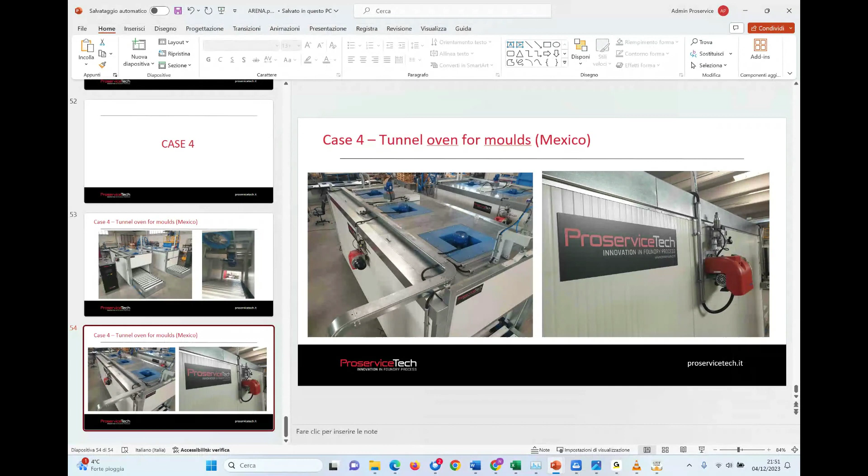Toni, do you want to run your slideshow? Tony's just going to set up his slideshow, so while we wait to see what happens - if you're like me, you're probably ready for something to eat now. Certainly Nicola's English is far better than my Italian, so I applaud his ability to speak our language better than me.